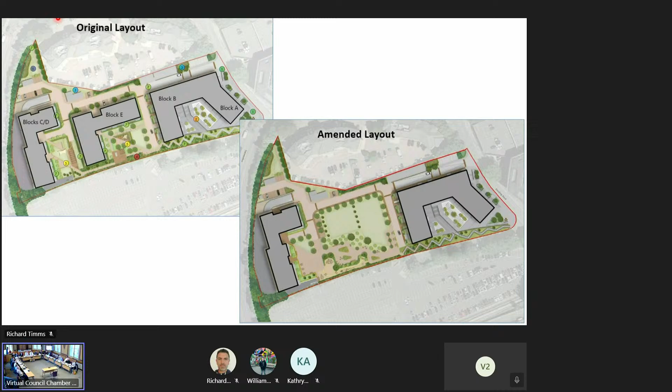And for the reasons set out in the report, we consider that's a positive response to those deferral reasons and represents an improvement. I'll just go through some other images the applicants have provided.

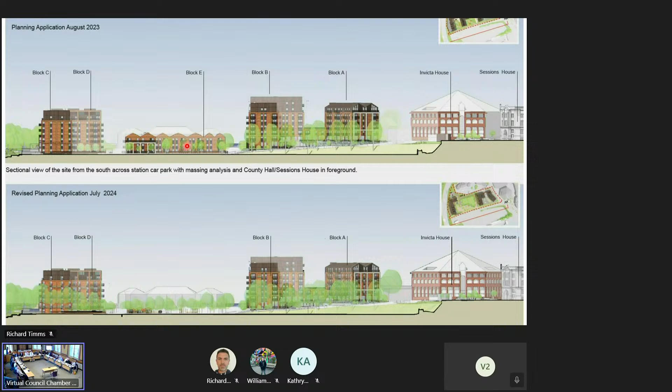So this is a cross-section, Sandling Road on the right, Invicta House. You can see the development, and in the centre there, formerly the 3-storey apartments have been removed.

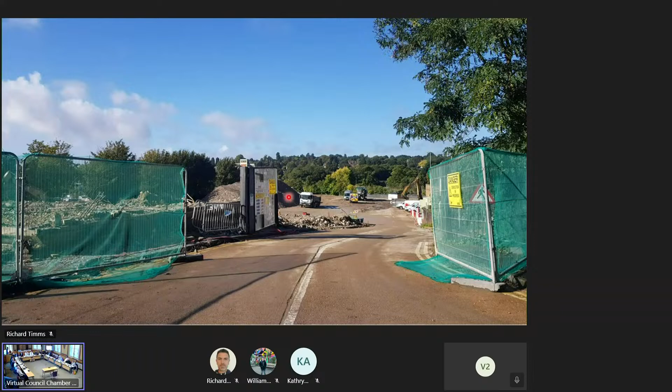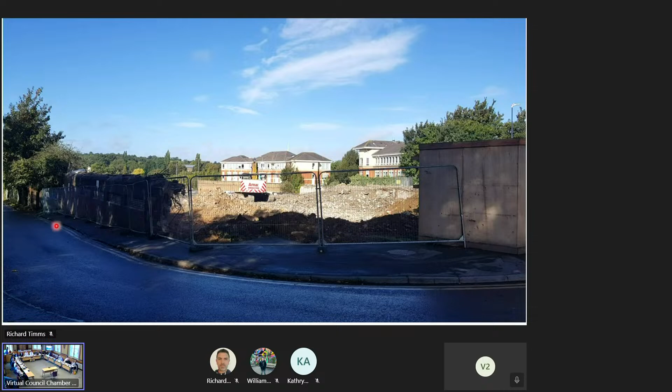Moving to the third and final deferral reason, this was essentially to see whether 100% affordable housing could be secured, but as was the case originally, the applicants reaffirmed their position that the provision of affordable housing is not possible, as set out in their viability evidence. That evidence predicts the scheme would be around minus £30 million in the red, and that's been accepted by consultants we have used to review that evidence.

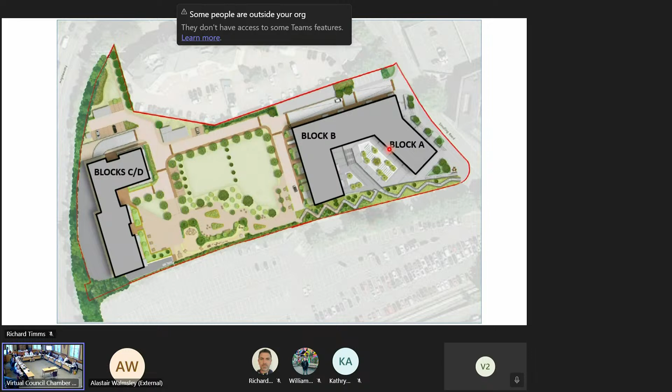The local plan review affordable housing policy places weight on whether schemes are viable, and has introduced value zones. The site's in the low value zone, where the policy can accept no affordable housing where that's evidenced. Even though the policy can allow no affordable housing, this does still weigh against the development, but we consider the benefits of regenerating a site which detracts from the local area with a quality development, the provision of a larger area of public open space, and the general public benefits outweigh the lack of affordable housing.

Okay, just a minute, I've got something coming in. Oh, it's in, I'm in now.

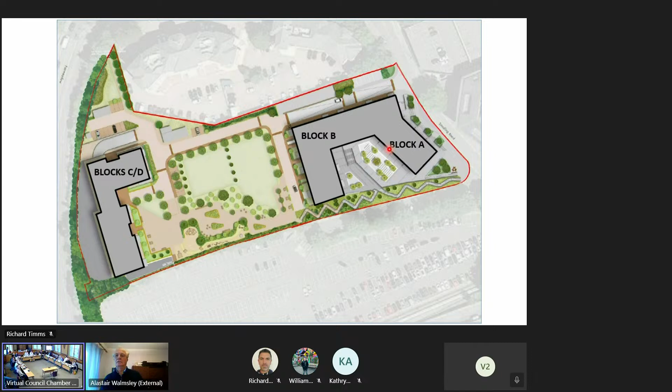For information purposes, the applicant said they intend to apply for Homes England funding, which can be used to provide affordable housing on schemes that aren't viable. In this case, they're looking to apply for funding for at least 30% if permission was granted. But as an award of funding is not guaranteed, we can't give that any weight in a decision.

That's purely for information. So in conclusion, the site's allocated in the local plan for housing and commercial uses, and we consider the proposals are in accordance with that allocation. The changes to the scheme on the back of the deferral are considered to respond appropriately and result in an improved scheme, and permission is therefore recommended once more. Thank you.

Okay, Rob. Yeah, thanks Chairman. Just a couple of detailed points.

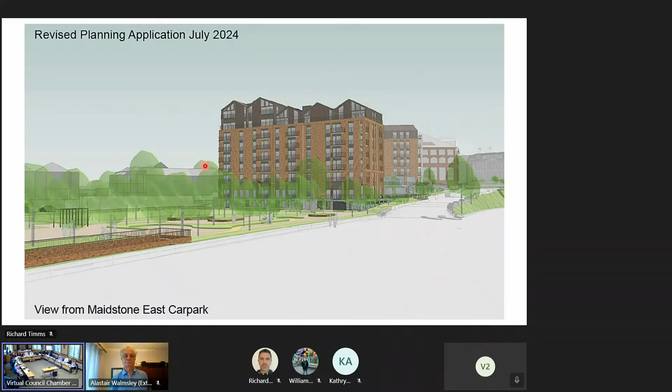We consider that the mass of Block B is entirely appropriate because, going back to first principles in terms of urban design, one would expect Block A to be of a certain mass because it's the frontage block. But another frontage has been created by the proposal for a public park, so Block B works in terms of its mass because of the new space it addresses. So I think the ratio is a happy one, the vertical to horizontal.

And then lastly, as Richard stated on viability, the applicant has submitted a viability assessment that's been on the website, as is required by national guidance. So everybody's had a chance to look at the viability assessment.

I'd just like to stress that the National Planning Policy Framework states, inter alia, in paragraph 58, that the weight to be given to a viability assessment is a matter for the decision maker, so you guys. But as Richard pointed out, in a very recently adopted development plan, Maidstone has decided to identify roughly half of the urban area, which this is within, as a low value zone. So the local interpretation of viability is that it is a strong material planning consideration, and the applicant has clearly demonstrated, and it's been verified by independent consultants, that the scheme is heavily in the red. Thank you.

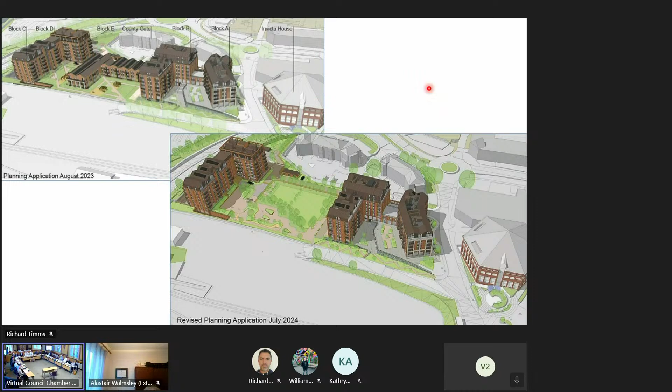I have a handful of points, would you like me to go through them? Firstly, around the hard standing around the new park. Obviously it's good to see a larger amenity space, but the extent of hard standing is still rather large, and I think we should invite the possibility of reducing it further.

I believe on that point, Councillor Field, there is a note in the recommendations about that being delegated to officers to deal with, to reduce the hard standing. Okay, thank you.

Secondly, on the planting on the site, despite the notes mentioning native vegetation, there are non-native invasive plants listed. I wonder if ward councillors could be consulted at the appropriate point in the development on the nature of vegetation. That is acceptable.

The next point I'd like to raise relates to the water spout feature. I understand the potential attractiveness of such a feature, but I question the sustainability of the feature once the development is occupied, and in terms of our aspirations around environmental sustainability, given the extent to which Maidstone is water stressed, whether a feature pumping water continually is appropriate and should perhaps be reconsidered.

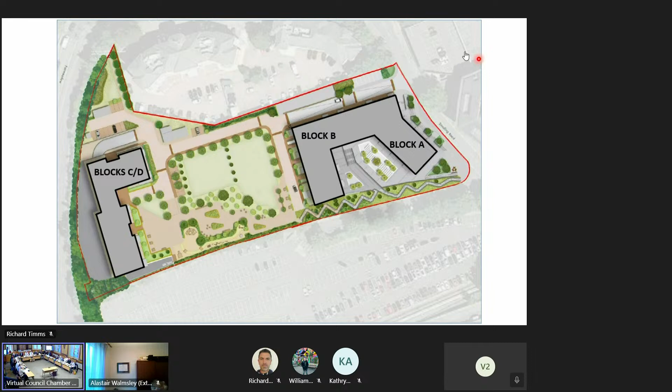Councillor Clear: just so we confirm that an application will be made for Homes England funding if this planning application goes through, I'd like that minuted, because that's my only concern about this. But I know it's a stupid system we have where we have to get planning permission and then apply for the money. Someone needs to change it somewhere.

I agree, and next time you speak to the higher ups, please do pass it on. But just to reiterate, we can put no weight on that.

Yeah, okay, so councillors, we're going to go to the vote. All in favour? And that is unanimous. That is approved. Thank you, councillors.

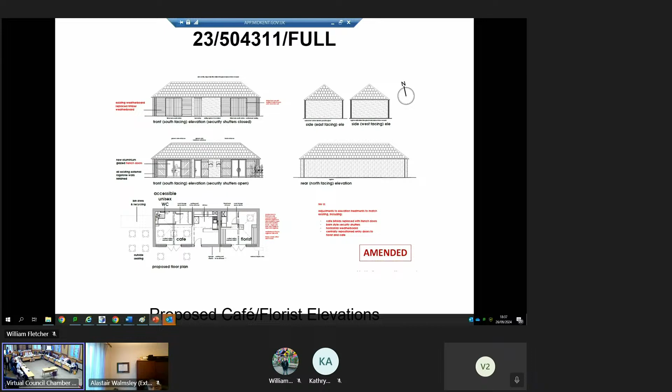This is the building to be converted. First, almost all of the area to the front and sides of the building is hard surfacing and significantly compacted earth, so it's likely that a lot of the damage to the soils has already taken place.

It is a working area and has a storage container. Parked vehicles, pallets, and other paraphernalia are discarded and stored in this area. So it's not assessed that the conversion of the building or introducing seating in this area is likely to cause more harm than the current situation.

There would be vibrations, noise, light pollution, dust, etc. from the existing use. So it's not assessed that the conversion of the building to a cafe and a florist would result in such a significant exacerbation of any existing impacts that harmful impacts to the ancient woodland and the soils around it would occur.

No objections around landscape and tree consultees have been received to the proposal in terms of the works to the trees to the north of the building. That's what's overhanging the building here, and the tree on the left side of the screen here would also be removed as part of the application. So no objections to those works.

Concerns were raised about users of the site entering the ancient woodland. There is significant ground cover around the area, which does make access difficult. The vegetation around the area is also very dense, but nevertheless there are some openings where in theory the woodland can be accessed.

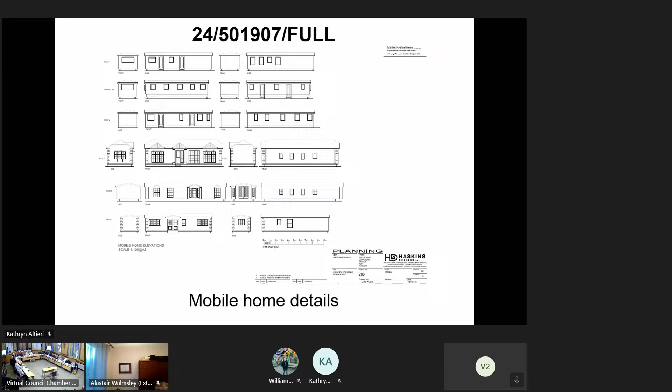That's the one. That's the main entrance site, is it? Yeah, I just think that considering that as the entrance to the site, if there is anything we can do to just improve the safety of it - if there is no walkway around the surrounding area, at least if there are vehicles coming up, we can just make that as safe as possible for the residents that are going to be using that site, even if it is just an entranceway.

Okay, I think we could put an informative on it, but I don't think there's any improvement we can actually make to the actual entrance at all at the moment on what's on the plans at the moment. Councillor Nagy. Okay, Councillor Cleaver.

Yeah, mine's more just commenting, wanting some more information. I've listened to what Councillor Russell said regarding previous conditions not being done. So I know Councillor Harwood said it's about the adjacent site. I suppose for me, are the applicants for this side the same people who have got the other side? Because I've got absolutely no problem having a gypsy traveller site.

That's absolutely fine. What I do have issues with is when planning puts conditions down and they're ignored. And I suppose my query is, who's responsible for the conditions that haven't been met that Councillor Russell is talking about, and is it the same people? In which case, are these conditions going to be applied?

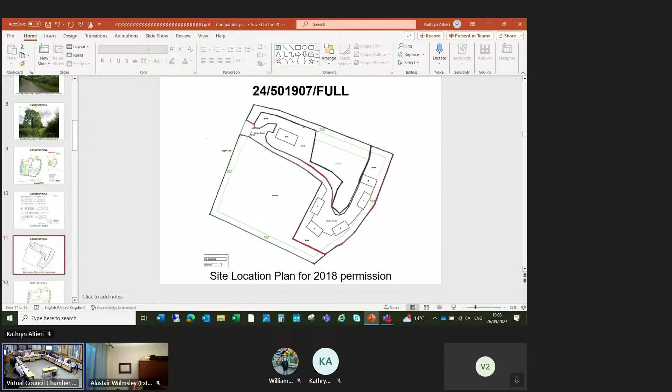That's my first point. And my second point, we're hearing that conditions haven't been complied with on the original site. We don't have a very good process for checking up on conditions, and it tends to be when a resident somewhere reports to say that hasn't been done. I appreciate it will be more than the job for one person, but I wish we could have a diary note somewhere, in 6 months' time, to say actually on every planning application, not just this one, on every planning application, 6 months down the line someone goes out and has a look and sees if all the conditions have been complied with. So it isn't necessarily relevant to this one, it's something for the planning team to take away. I think we need a conditions compliance team that do this on every application, from 200 houses down to 1. Thank you.

I think we'd all like that, to tell you the truth. I think we've all got areas in our patch with planning conditions still outstanding. However, I will bring the officer back in to clarify the boundaries.

So the plan I'm showing there is the 2018 permission, which I tried to highlight in paragraph 101 of the report by hatching the area. That's the 2018 permission, and that's what's got permission for 5 mobile homes. The current application is the red outline to the front of the site, and that is for 7 mobile homes. In terms of the conditions, we do have the site development scheme condition, which says that within 3 months, if details haven't been submitted and approved, the permission lapses, and that condition is tracked.

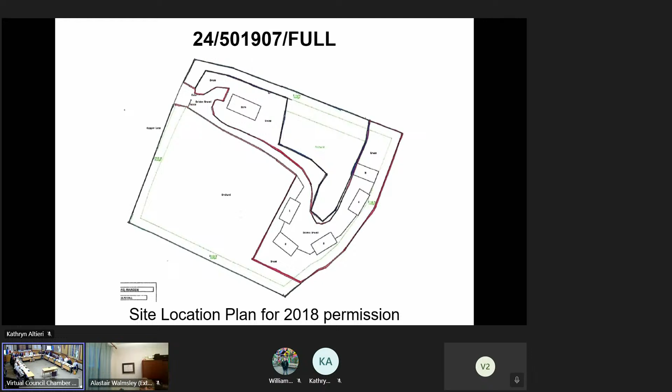I think we are a bit of a rock and a hard place with this. I will bring in Councillor Cox in a minute. Obviously, there's an enforcement outstanding on the other side, but we have to take this application on its own merits, not the other side. I agree with you, Councillor Cleater. It's not ideal, but that is the correct policy and the way we should be deciding this item.

So I think with the deferral, I don't think it is a case that we can actually go to deferral now. I think we've got to propose a seconder. I'm going to have Councillor Cox, and then I'm going to go to the vote so we can actually wrap this up. Councillor Cox. Thank you, Chair.

I just wanted to reiterate a point I made on a previous planning committee that I'm not a fan of retrospective applications, especially where there's been opportunity for, and there's genuine awareness from the applicants that they need planning application. So for me, with the enforcement concerns as well, I think deferring it and giving the opportunity for those conditions to be met is the right outcome.

Okay, complete swing. So, Paddy, you proposed it, you seconded it. Councillor? Yes. Okay, so we're going to wrap this up and get this deferred. So, sub-motion. All in favour of deferring? Okay, those against? Those abstaining? One abstention. Okay, that is deferred.

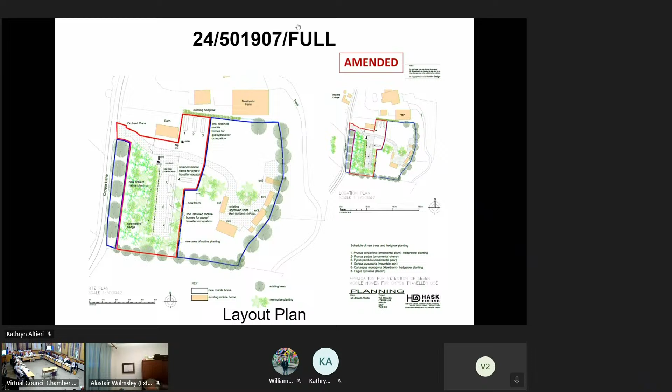Moving on. I call upon Francis and Rebecca to introduce the item.

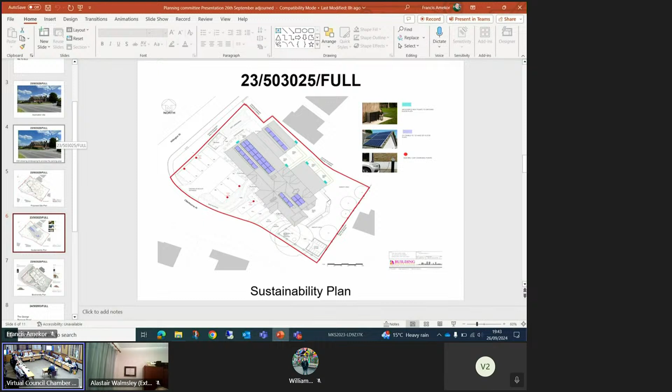In particular, they are planning to destroy a significant feature brick wall and an existing attractive area of grassland by converting it into a large car park with hard standing. Ironically, even by doing this, they will still not provide enough parking spaces for the flats.

This overdevelopment will make the already limited on-street parking even worse. Destroying the undeveloped land to provide car parking at the expense of amenity land is not the right way to go about things. It's simply wrong.

Planning policy DM9 is a key policy consideration for this application. This prescribes that the conversion of existing buildings for residential use will be permitted when the following criteria are met. The proposal would fit unobtrusively with the existing building were it retained and the character of the street scene and its context. Traditional boundary treatment of an area is retained where feasible and reinforced.

Sufficient parking would be achieved without diminishing the character of the street scene. It is quite clear that these criteria are not being met.

Chairman, the council now has a significant number of green councillors and is supported by many members of the public who want to put environmental considerations and not the destruction of undeveloped land at the heart of decision making. This application is simply an example of too much being shoehorned into too little space.

Therefore, we request permission be refused, the developers come back with a more appropriate and environmentally acceptable scheme. Any such scheme should have significantly fewer but larger apartments in keeping with the existing standard of properties in and around Osborn Place, that a site visit is undertaken prior to a final decision being made. This would go some way to validate the green credentials being espoused by the council.

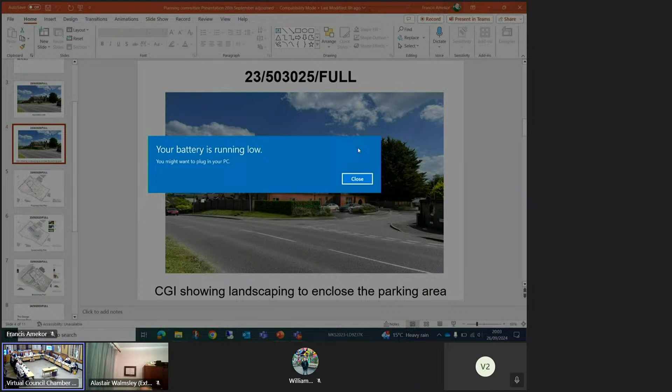However, this application is policy compliant. We deferred for some set reasons. We were given either clarity on those reasons for deferral, or there were changes made to the application. As has been pointed out by virtually everybody who's spoken, there are no grounds for refusal, and we can sit here all night saying we don't like it, but frankly, we're a regulatory committee that is governed by the development plan, and the development plan says it's okay.

So therefore, to try and lance the boil, I'll move that we do grant permission as per the papers. However, with one change, which I think is really important. We managed through negotiation to achieve more landscaping, to enclose the site a little bit more, despite the loss of the lawns and so on, and to make up for the loss of the wall.

However, we only have a 5-year replacement policy in here, which means that after 5 years, the whole lot could be taken out, and the residents get the full view of all the parked cars, the tarmac, and everything else. So therefore, I recommend that the...

circumstances would require a 10-year replacement condition, and then the residents can keep a beady eye on it. And if anything happens to that landscaping, enforcement can come down on the site operator to ensure replacement. And that will mean that the landscape management plan that accompanies it would have to become a 10-year, not a 5-year landscape management plan, to ensure that we do allow that to mature.

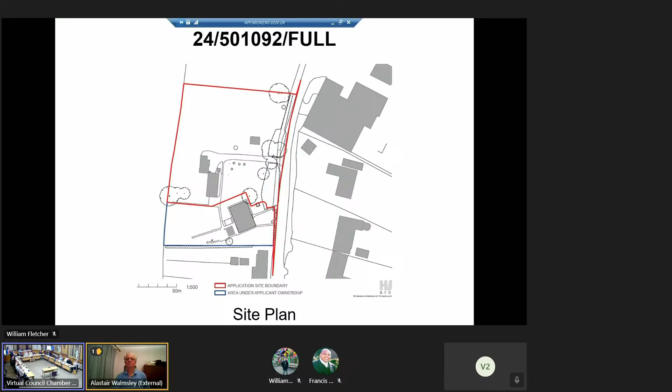In policy terms, the application site is located in the countryside and within the Kent Downs National Landscape. Warren Street consists of a collection of dwellings on large plots, a public house, and a cluster of agricultural buildings at Blue House Farm. The loose grouping of the dwellings and the large plots on which they sit results in the area having a spacious and rural character that reflects the countryside location.

The National Landscape's AONB management plan identifies that the designated area comprises diverse special characteristics, including expansive open plateaus, narrow lanes, and a modern agricultural landscape. All of these features can be seen in the area surrounding the application site.

So the proposed dwelling is divided into 3 sections with gabled roof forms. The applicant describes this as a tripartite approach, used to break up the mass of the building, referencing the repeating gables found in the local vernacular.

Each of the 3 sections of the building uses a different material palette. The applicant sets out that the use of different materials in each section enables the transition from an agricultural to a residential material palette.

For example, the northern section uses flint, vertical timber cladding, and standing seam metal. The southern section, on the other hand, is residential in character and a warmer tone compared with the agricultural elements of the building. The dwelling would be sunk into the ground, as pictured, to reduce the visual impacts of the development, with an extensive landscaping scheme which in time would further screen the proposed dwelling.

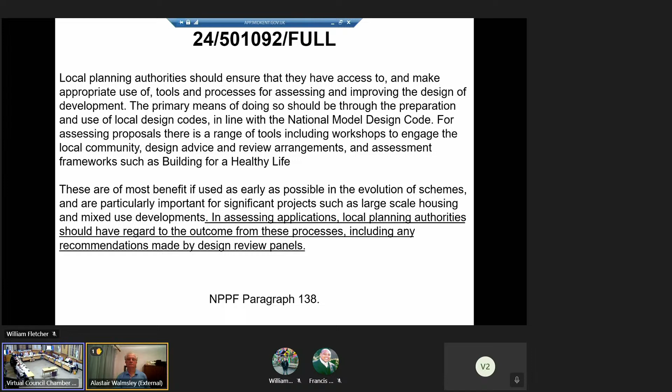Paragraph 138 refers to how the LPA should have regard to the outcome of design panels and the outcome from these processes. Paragraph 139 refers to poorly designed development being refused, and states that conversely, significant weight should be given to development which reflects local design policies and/or innovative designs which promote high levels of sustainability or help raise the standard of design more generally in the area, so long as they fit in with the overall form and layout of their surroundings. So the focus is on innovation and raising design standards.

For example, zero carbon dwellings once would have been considered innovative. These were built and now all dwellings should ideally be zero carbon. So the design bar has been raised, and now what is innovative is an even higher standard, just for example.

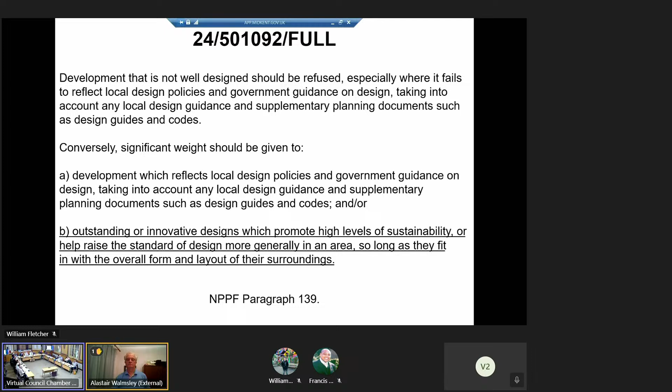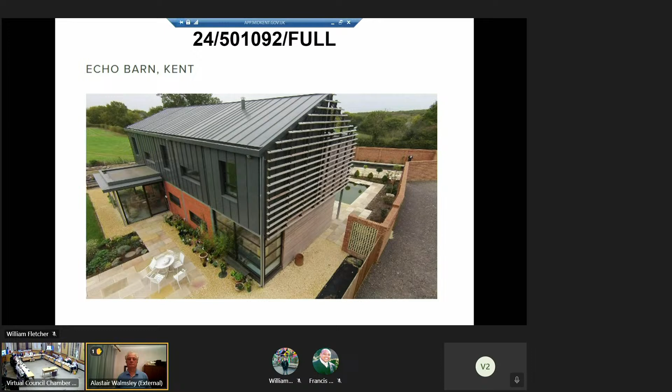So I've got some other examples of exceptional dwellings. These are under paragraph 84, which is the highest design bar, but I include them just to demonstrate that there are very different approaches to this type of development. For example, some are quite restrained in approach, some more outlandish, and some hidden, but they don't necessarily need to be hidden to be acceptable. But all these dwellings look good, and the design is not entirely about the development itself.

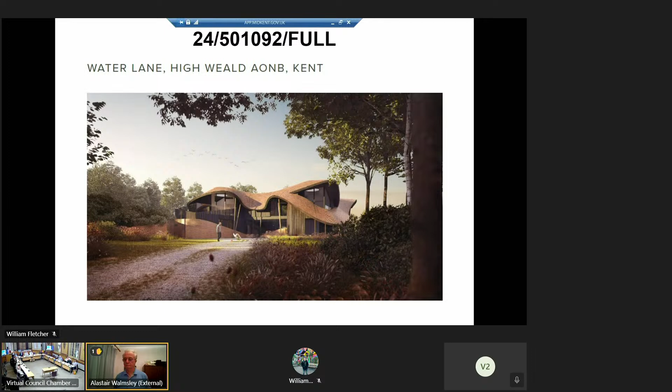The applicant has commissioned a design review panel to consider the application, and their feedback is a material consideration. While this has been considered, we do not consider this to be an exceptional design or exceptional circumstance. Paragraphs 138 and 139 specifically refer to outstanding and innovative design, and it is concluded that the current proposal does not meet this extremely high bar in this location.

If we break this down, the proposal involves engineering works to sink the dwelling into the ground and then establish landscaping and biodiversity enhancements around the site. The dwelling is well considered and does reflect the materials and form of surrounding development, but all development needs to reflect the character and appearance of its surroundings. So this isn't innovative or outstanding in its own right.

This design approach could easily be replicated on other sites in the countryside, so it's not unique, innovative, or outstanding. The site is in the Kent Downs National Landscape, and great weight should be given to the conservation and enhancement of the Kent Downs National Landscape.

The duty on the council in this circumstance is to further the purpose of conserving and enhancing the natural beauty of the area. It is concluded that the proposal fails to meet this requirement, nor is it in compliance with national planning policies or the local plan review. As such, it's recommended that the application be refused on the grounds in the officer report. Thank you.

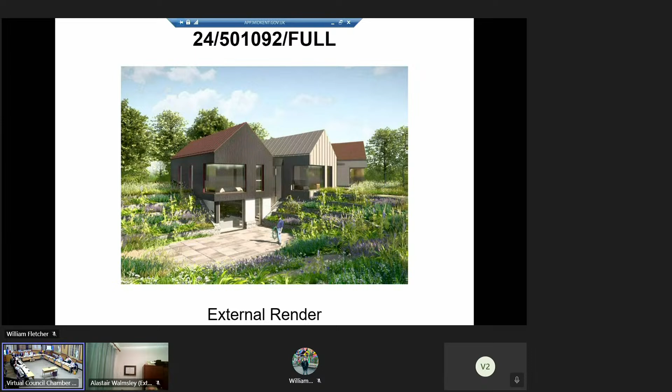I've got two points. One is a point of concern and probably a condition, which is whether with the three gables there's any possibility in future they could be split into separate accommodation. I think that would undermine its overall proposition.

It does sit within an existing hamlet of Warren Street, which I think is good. It's not as if it's in the middle of nowhere, which makes it supportive for me.

My final point, I promise, is a design point. I'm a big advocate of the Kent Downs, as you all know, and very protective of them. I don't like the use of render in a national landscape. It's not a material you'd see naturally, it's a 2020s thing where we're getting more and more rendered houses. I think if the materials being used were more consistent with the natural materials you'd find in the landscape, then it would be highly acceptable.

So I'm on the fence at the moment in terms of my recommendation. But if we could get some amendments to materials and then get a visual of the other elevation, I think that would be useful. Thank you.

Thank you, Councillor Cox. Councillor Cleaver.